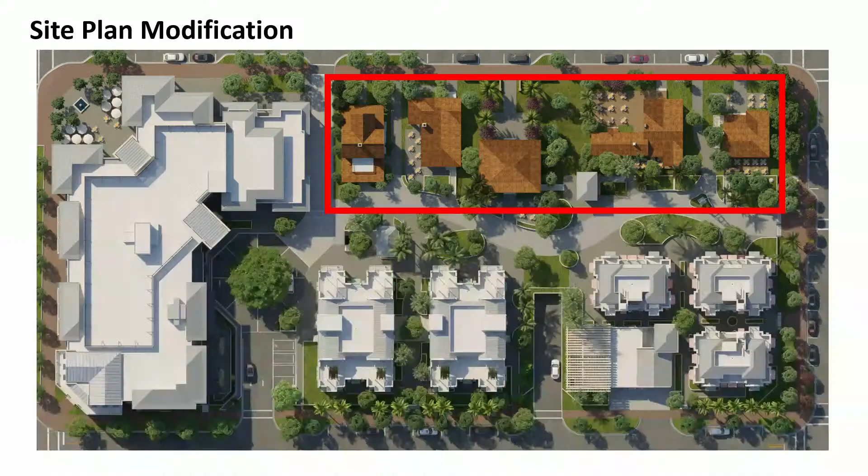Specifically tonight, I want to focus on the area within the red box, the historic homes. Just a quick outline, we're here tonight to talk about the proposed hood vents for future restaurants. Previously, we came before the board seeking approval to change the use of these from retail to restaurants, and so we're here tonight to seek approval proactively on the proposed hood designs in the event a tenant needs them for building out kitchens and things like that.

We're here to talk about the ADA ramps. I believe they might have been previously shown on the site plan, but they were never part of the elevations previously, so the new architectural set now has those integrated into it, so you can see them on the structure, as well as bring to the board's attention that as we are rehabilitating the structures, we would be replacing damaged wood only as we restore each of the homes.

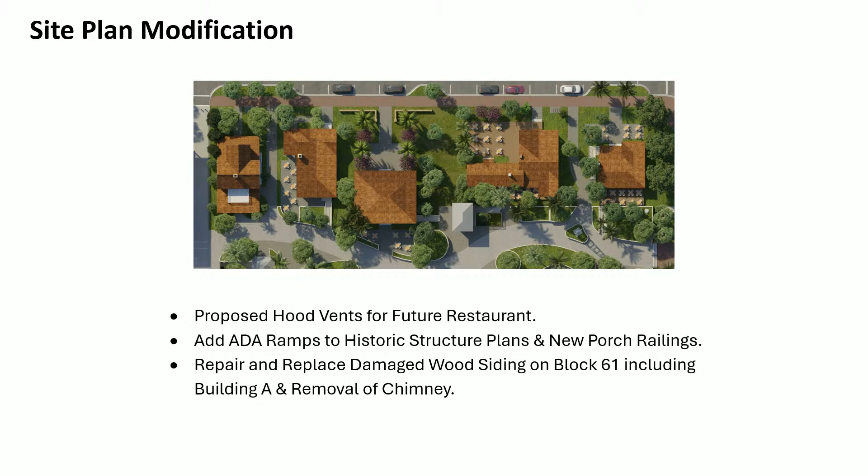So we'll go in order of all the homes. Starting with building A, the rectory. On the left side, you'll see what was originally approved. During the design process and as we're working with tenants and signing leases for all of the spaces, it was brought to our attention the concern about people falling off the porches. Tonight here, as we go through, you'll see we're requesting to put railings on each of the porches.

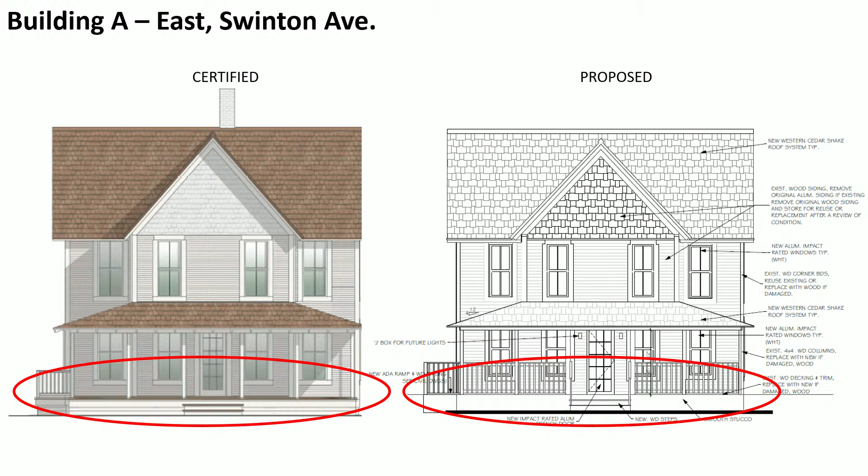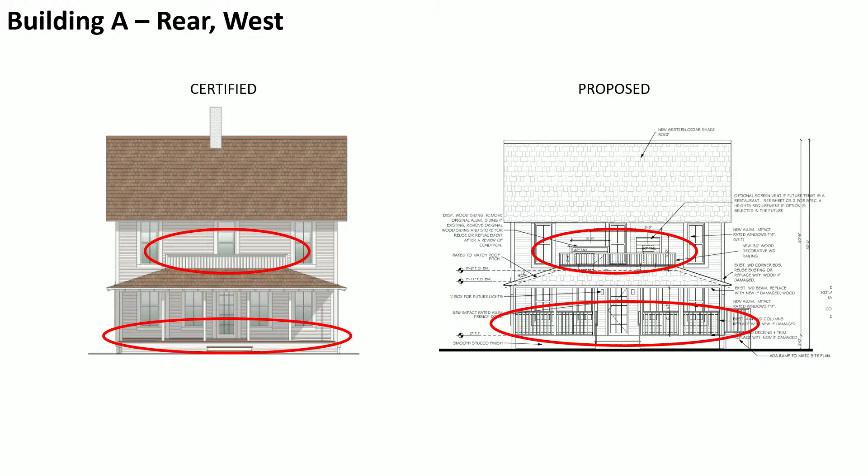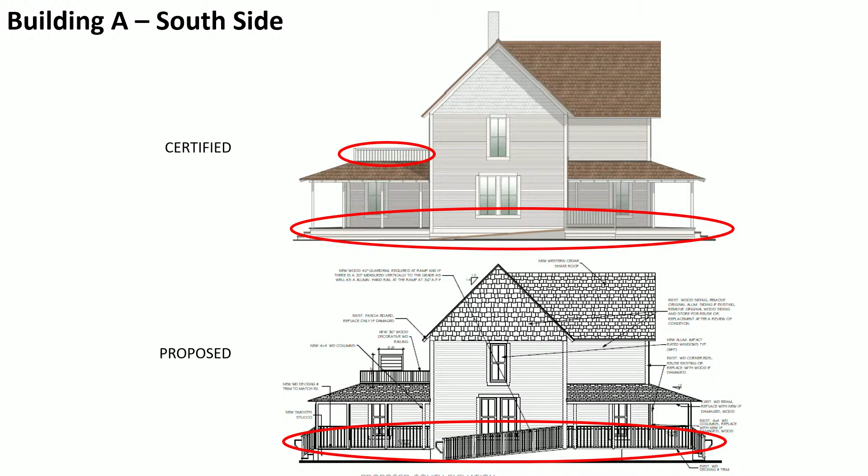On the rear, so down below, you'll see again railing detail the change, and then the proposed location for the hood vents. South side, again showing what was approved, and then down below you'll see the additional railings. I forgot to put a circle over there, but that is the proposed hood vent location.

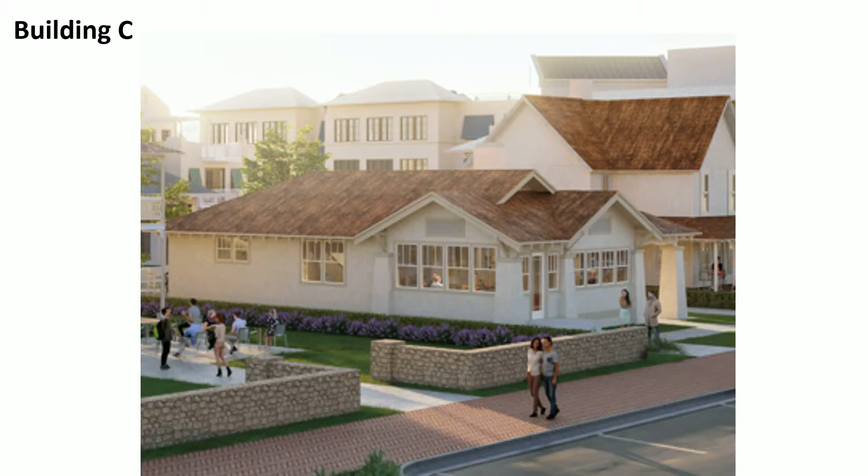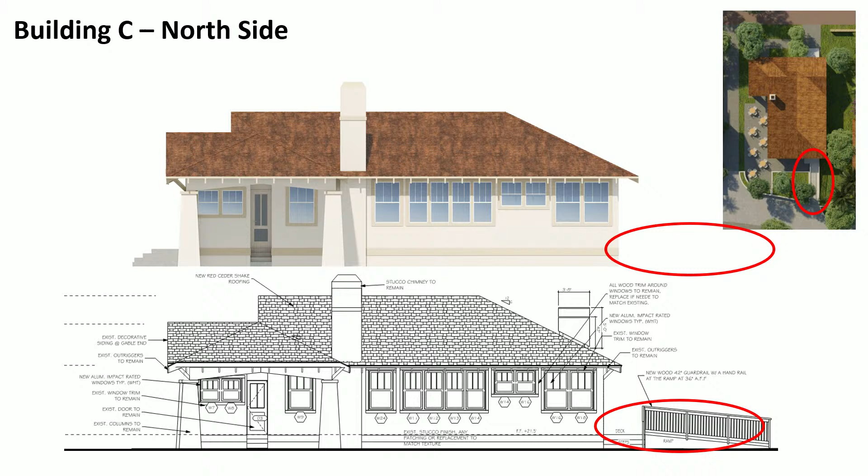And then jumping into building C next to it, adding handrails to the front steps, shown here. In the rear, adding the railing to the architectural elevation. In the original site plan, as you can see on the top right corner, we were always showing it, but want to add it to the elevations.

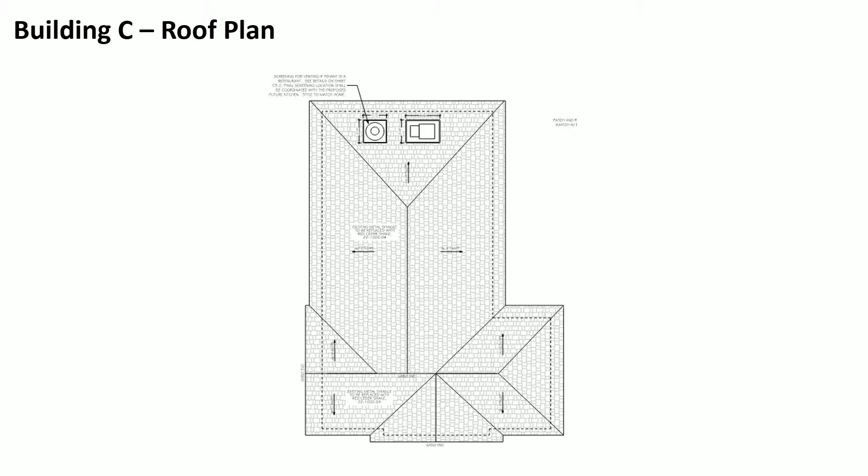And then from the south side, you can also see it's now added. And then for the hood vents, also on the rear of the building. Building C, for example, is rented out to ice cream tenant, Van Leeuwen. So I don't know if they're going to need this, but again, just seeking the overall approval.

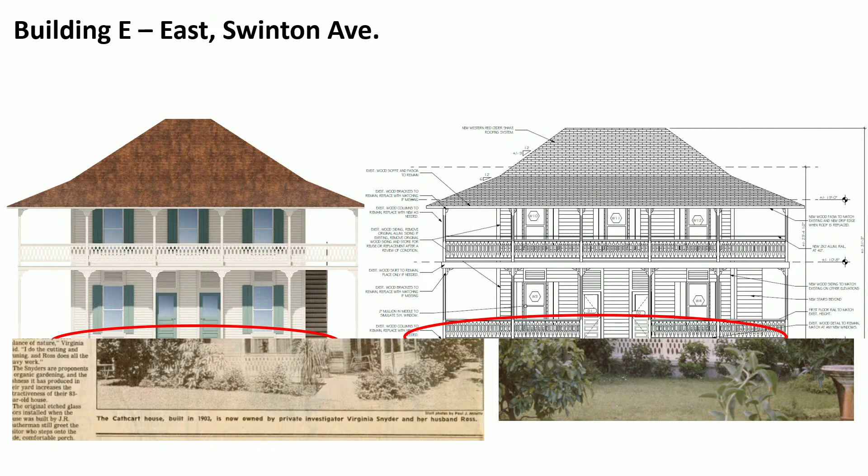On the left side, you can see the rendering we did, and the rendering on the right was what we originally were going towards to restore it. So we know later on, eventually someone did add in a railing to the first floor. And so we're now coming back, realizing that we should have kept the railing on the first floor for safety reasons, so that nobody falls off the porch. And then the railing on the first floor would match the second floor as well for consistency.

So the south side, the west side, and then, sorry, I forgot to circle it again, but you can see on the rear, that's where a proposed location would be on the west side. As well as the ramp, again, it was on the site plan, but just being added now to the elevation.

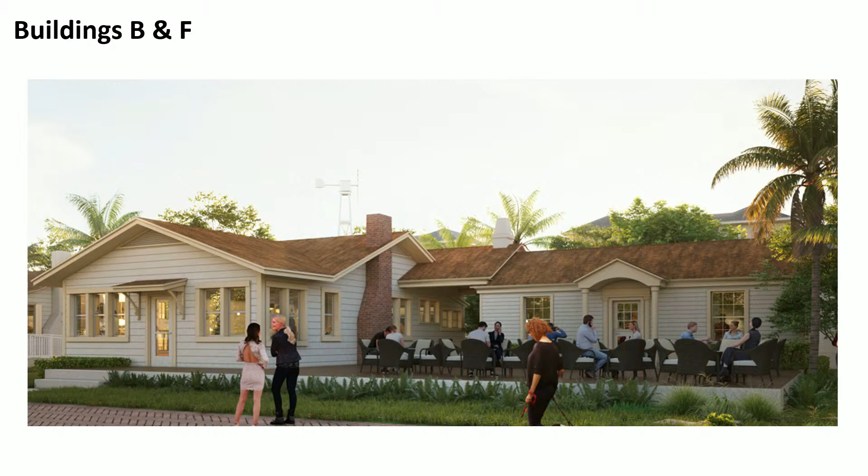The connection of B and F. In this rendering, you can see where we didn't have any railings whatsoever, on the raised area, and so coming before you now, seeking the approval to put the railing.

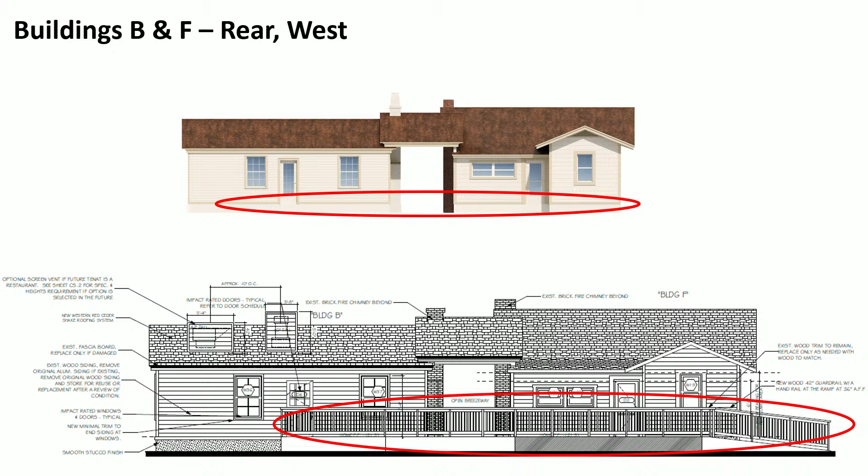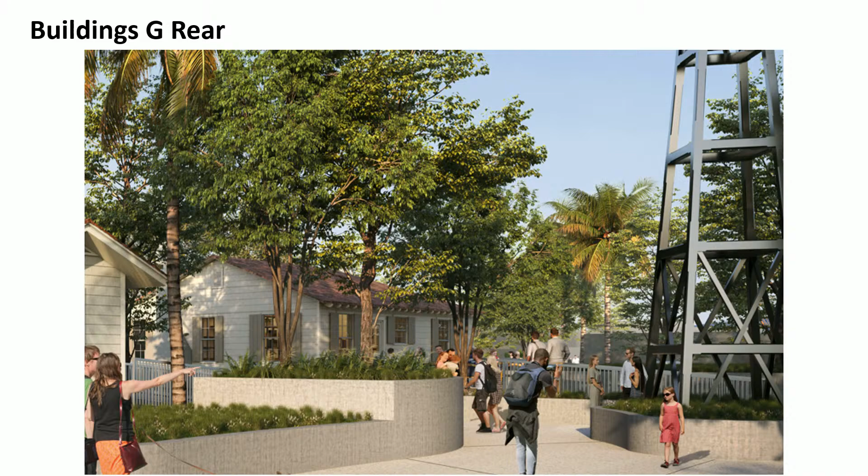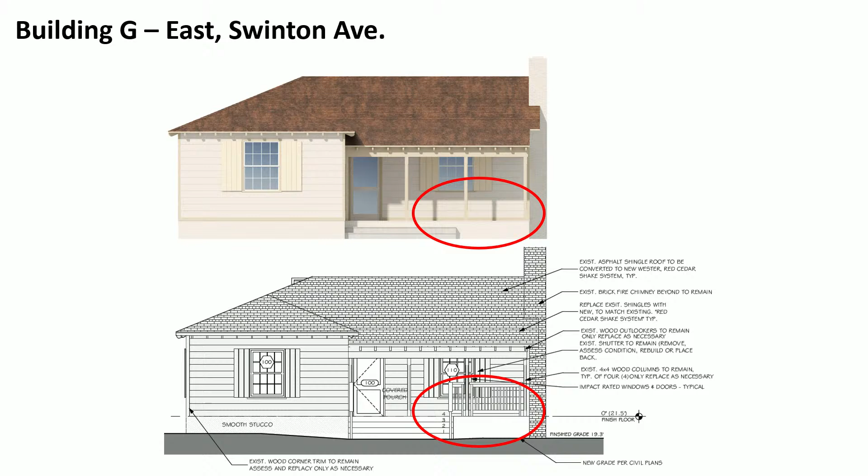Here was a zoomed in rendering. You can see where we had the railing already on the plan. The changes now are the same thing: putting a railing in the front, a handrail for the step, and on the north side you can see how the rear deck was not shown on the original elevations, so now they're being added back in.

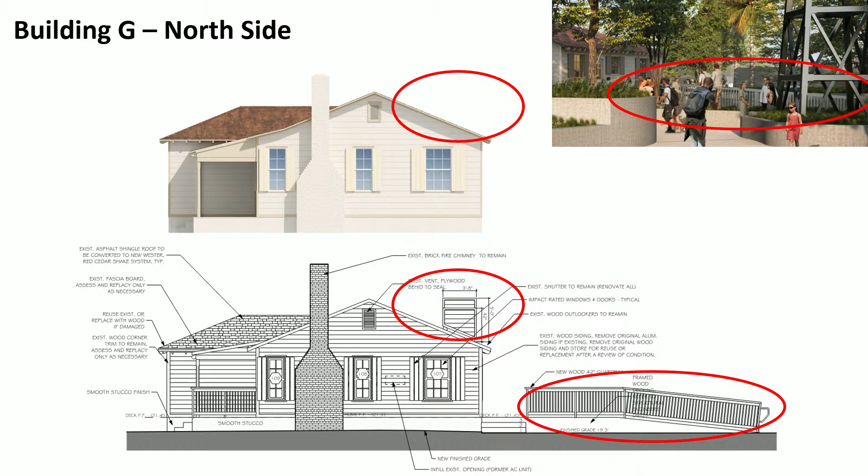And then you have the hood vent, which I remembered to put a circle on. And then on the rear as well, you can see the vent hoods and the decking. And then you see the ramp on the bottom right side.

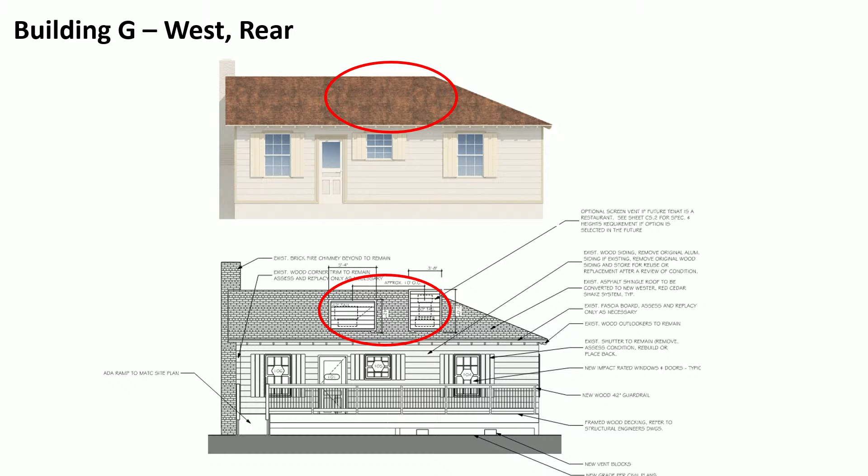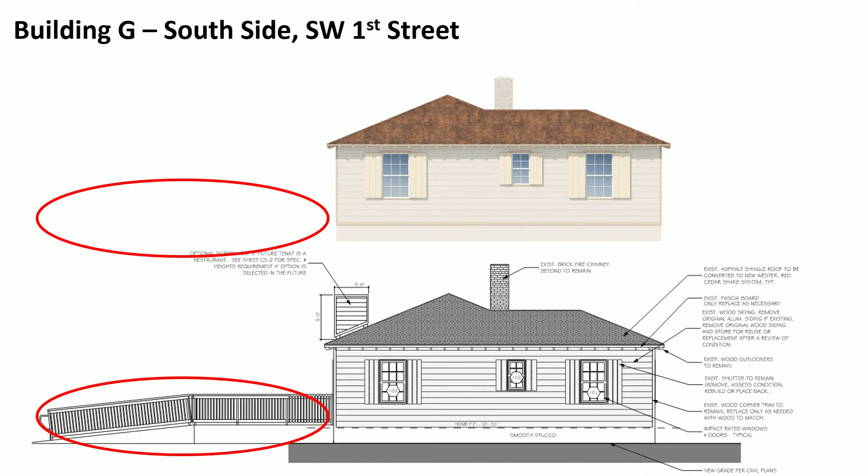And then on the south side, this is the southwest First Street. This would be blocked by the planters, so it would never be seen from the road, but this is what the elevation would look like, having the ADA ramp and the deck in the rear. And then the roof plan.

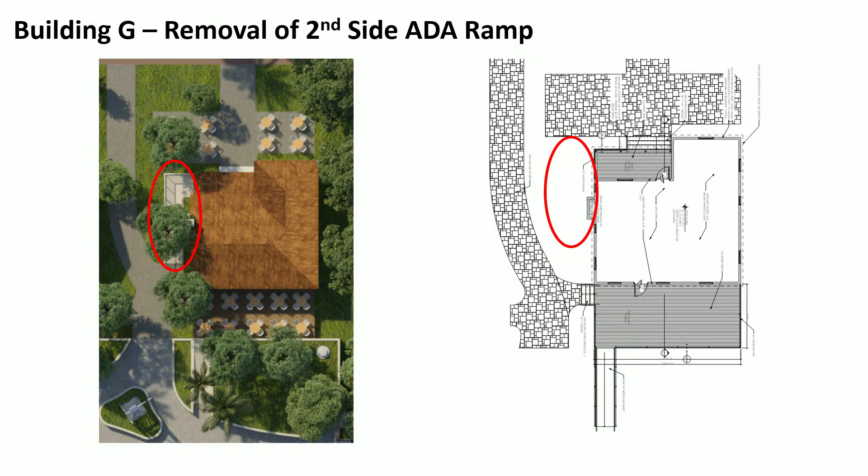And then we did remove the second ADA ramp from the front. I think after working through it with staff, it was deemed unnecessary, and it was seen from the front of the building, so to keep the historic character of not putting a ramp in the front of the building, we've eliminated it. So now there will just be the ADA ramp in the back, and that will be filled in with landscaping.

And then here's a detail in your files. You've got two different versions. The ones on the right have wood siding, so that way they blend in with the architectural style of these structures. And the one in the middle right here, that one is stucco. That would be proposed to go on the ice cream shop.

Building C is the only stuccoed historic structure on the site. The others all have wood siding. And then the detail on the left is just your 2D plan view of the cover around it, and up top on the left you've got the railing detail.

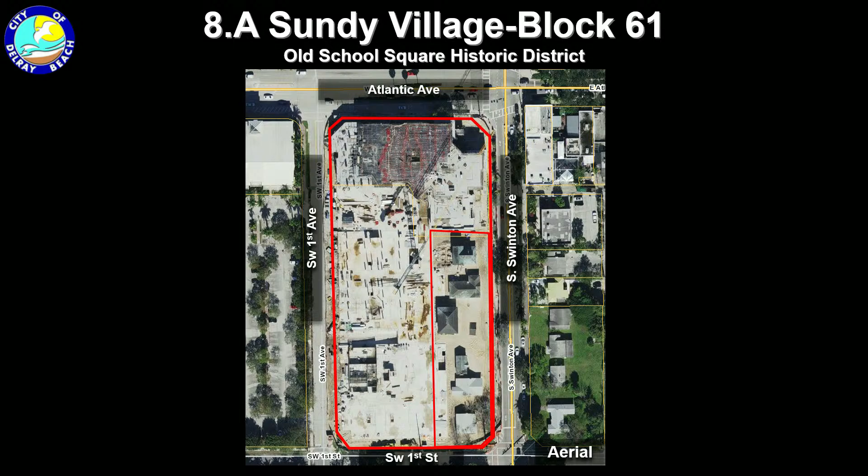Okay, so here you can see this is all of Block 61. You can see that we're just looking at the historic structures on the southeast corner of the site. This is a close-up of the site plan. So here, all the red outlines are where the ramps and the hand railings are proposed to go. I'll show you a little bit further on where the hood vents are.

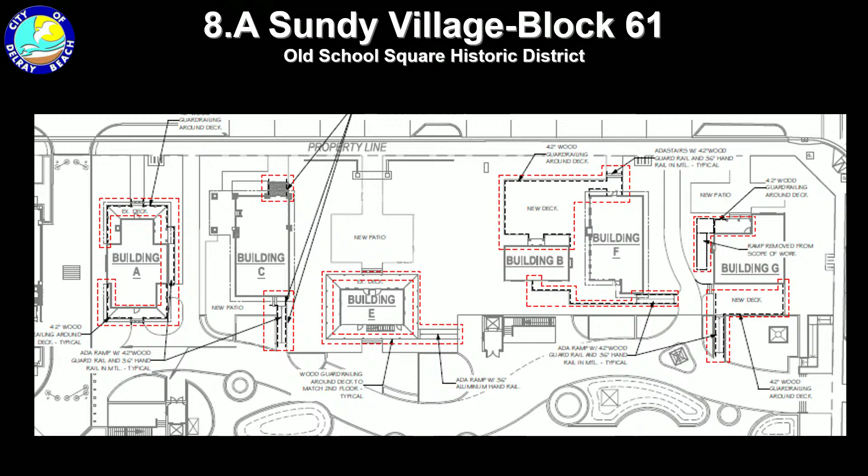Just for the record, they're requesting two, specifically one's for air intake and the other I believe is for exhaust, so each structure will have two hood vents. We did work with the applicants over time to make sure the hood vents weren't visible from the public right of way, so all are proposed on the west facing side. So you won't see them; they won't be prominent from the east. So the front facades won't be as visible.

As Mr. Hockman did mention, they have 3 different types of venting. The top 2 are proposed for all the wood-sided structures, and the material to be used is Hardie board, which is appropriate because this isn't an original part of the structure. The third one is for the stucco building, which I believe is Building C, and that's just to match the siding on that one.

This image that's really small here is for the handrails. I believe the handrails are going to be aluminum, with the rest of the railings to be wood.

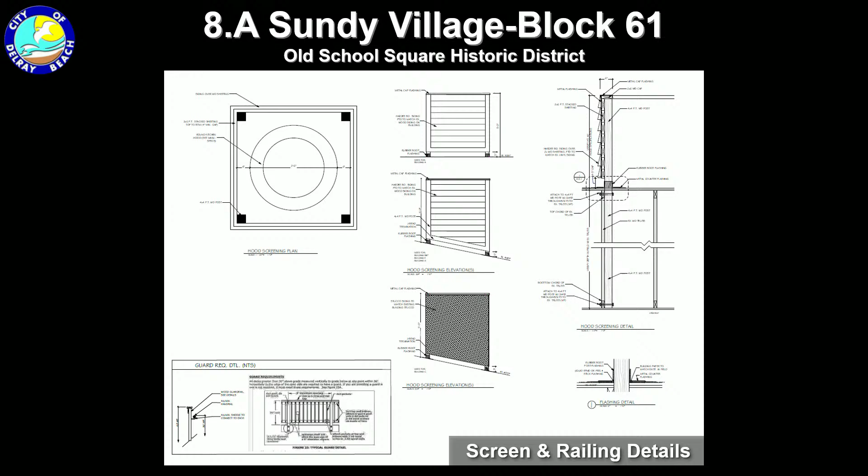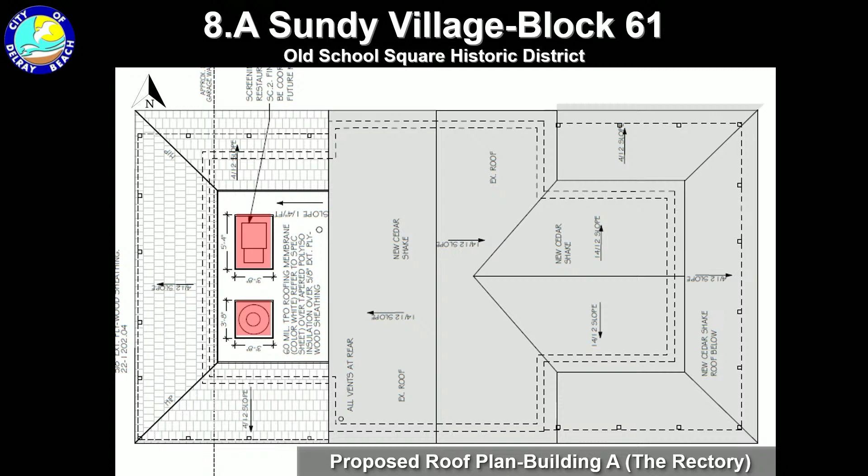So the highlighted areas are going to be floor plans and roof plans that show where the hood vents and the railings are going to be situated on each of the structures. First one is Building A, which is the rectory. Here on the west side, you can see the 2 proposed hood vents. The red outline on the floor plan shows where the hand railings are going to be, in addition to the red highlighted areas where the ramp is proposed to go.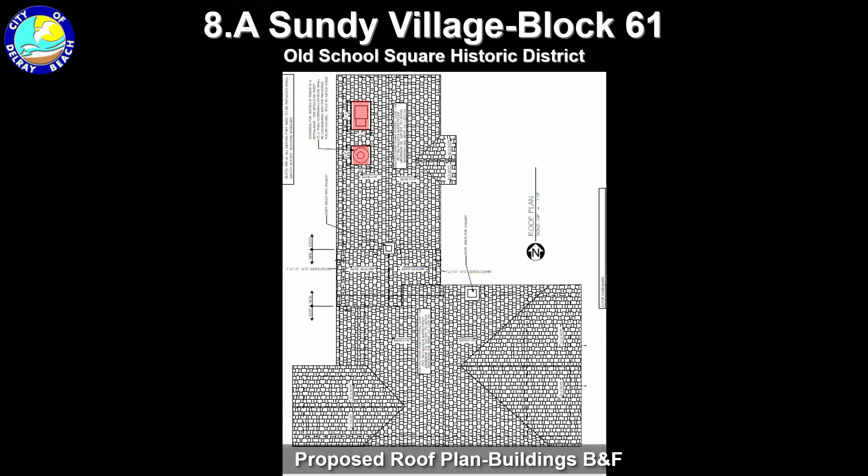Okay, this is the proposed roof plan for buildings B and F. Here you can see this is also on the west side of the structures. Here you can see all the hand railings as well as the proposed ramp.

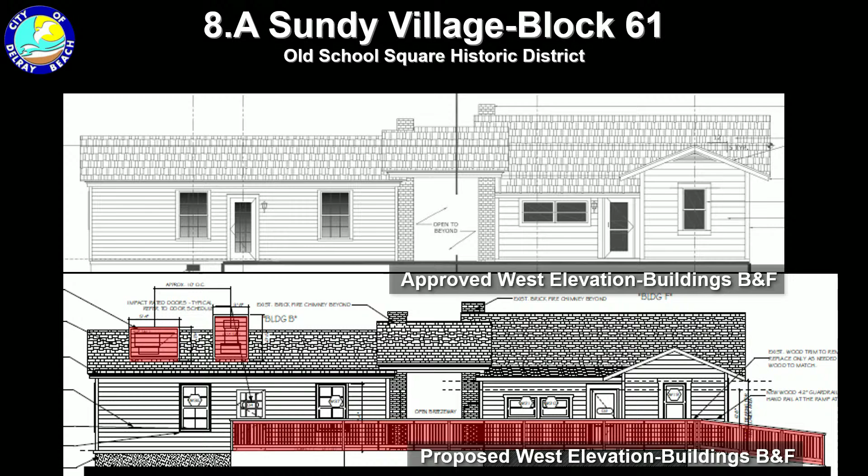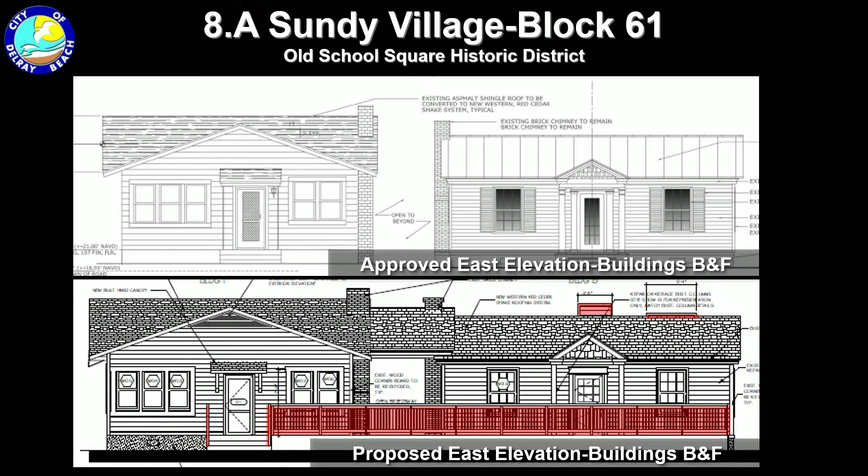Okay, this is the west side, so you can see most of the ramps and the hood vents are more prominent. This is the south. Proposed east, so they're slightly visible, but not as prominent as the west.

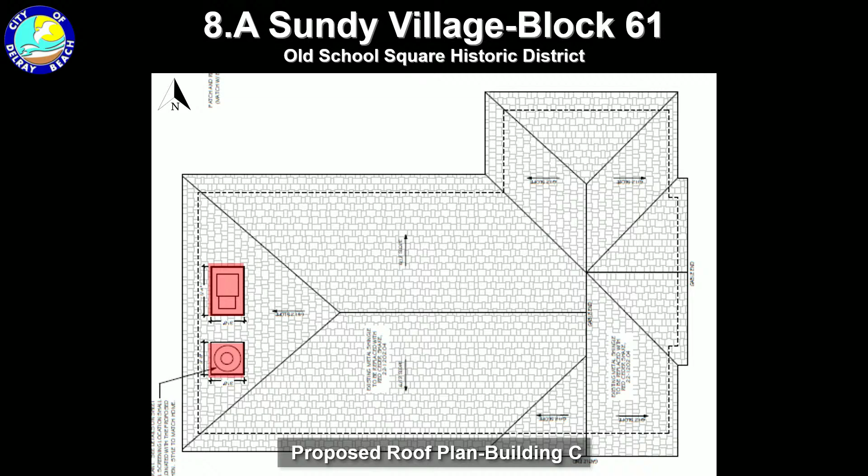And then, as they noted, I think this was the one where they removed the original ramp from, so they have the guardrails on the front in the east, and on the west they have a longer ramp.

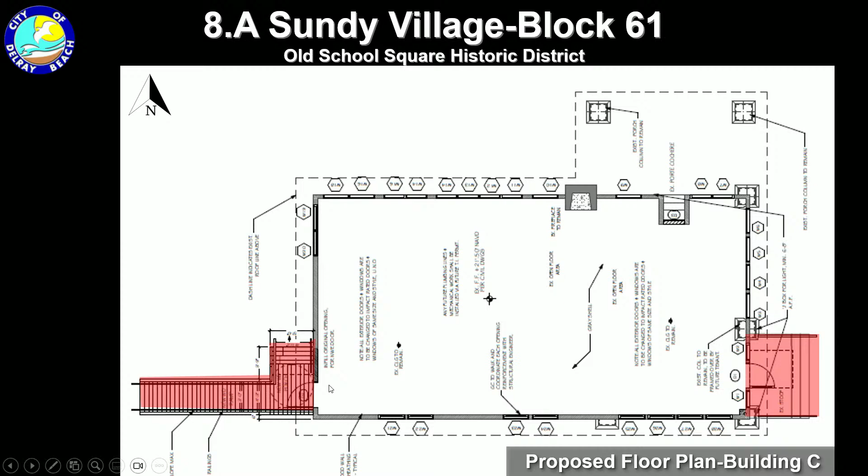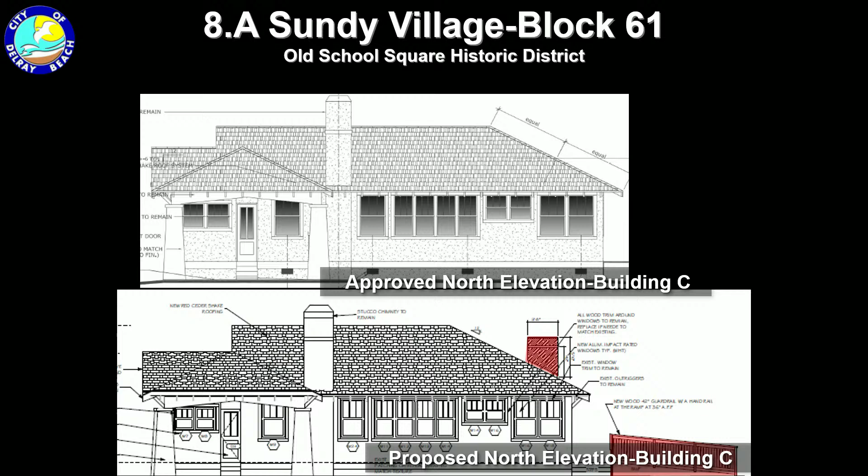Okay, this is building C again on the west side. This is south. This is north. And this is the east side.

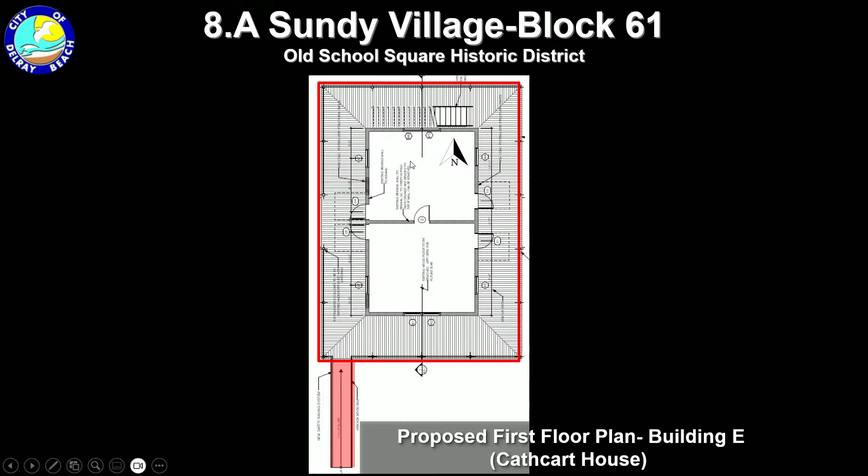This is building E, this is also Cathcart. You can see the railings are all on the outside of the structure on the first floor, and the ramp is to the south.

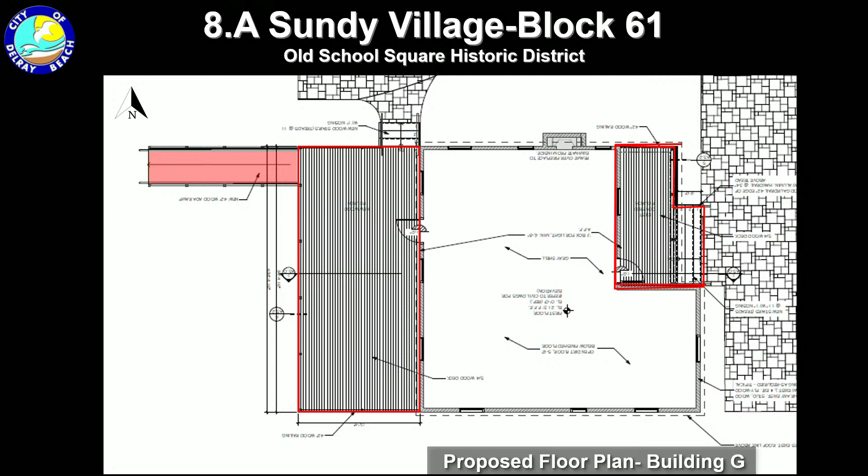This is building G. Hood vents are also on the west side. Here you can see the visual of the railings and the ramp.

This is proposed south side. This is the west. This is the north. And this is the east.

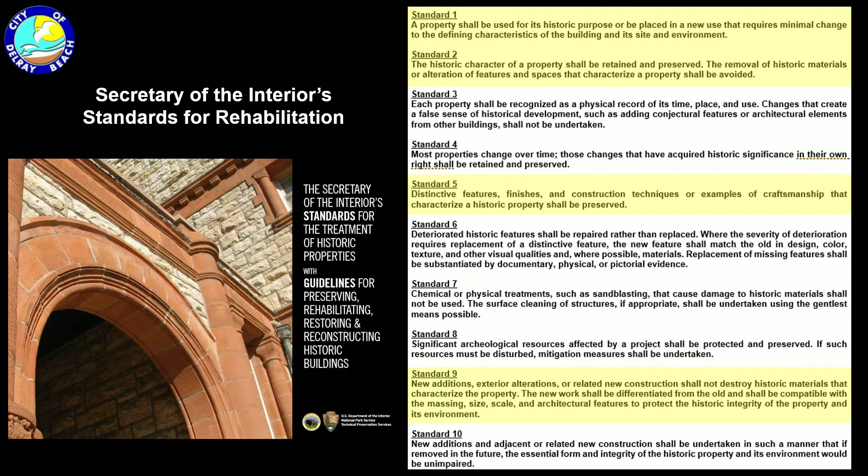Okay, the Secretary of the Interior's standards that applied were standards 1, 2, 5, and 9. These are some of the excerpts.

We did note that with the request for the change of wood siding, all the replacements, appropriately any type of wood siding that needs to be replaced should be beyond repair. We had a site plan technical item, and we talked to the construction workers on site, who documented quite a bit of all the different changes they made for the siding. They're going to give us documentation showing that the damaged wood beyond repair has been replaced, and what was salvageable is still existing on the structure. So we just added that as a site plan technical item.

And in addition, we did mention the siding, the ramps and the guardrails, we considered those also appropriate materials.

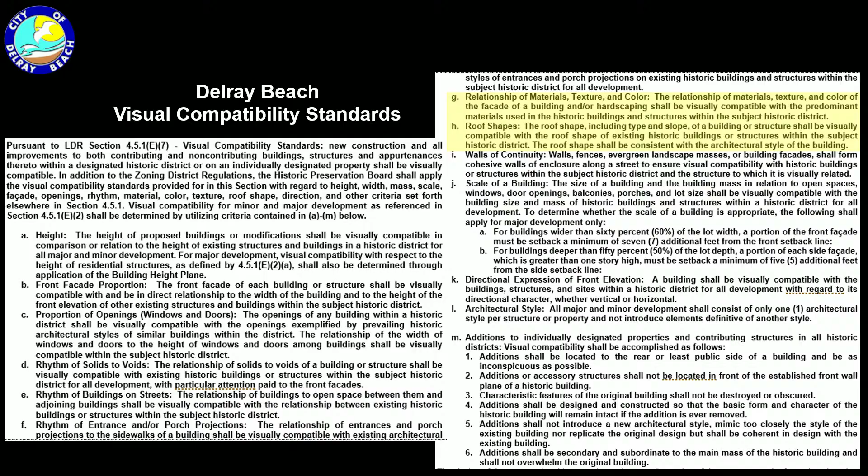Okay, roof shapes and materials were the standards for visual compatibility that applied to this request.

Did we have, at the time of print with the staff report, the state's response? Yes, we did review it because as a CLG, they now offer a review for ADA ramps and materials for historic structures. We submitted the ADA ramps and the hood vents to the Department of State, Division of Historic Resources, Bureau of Historic Preservation, to be specific. They did the review and had no comments. So all the requests for the ADA ramps were considered appropriate at the state level as well as staff's.

Thank you for that. And that concludes my presentation.

Okay, any comments from the public? Now, I know there were a couple people in the back of the room who stepped out. I'll just take over for them. Well, we can do that.

George Long, 46 North Swinton Avenue. I'll leave this business about Department of Interior and visual compatibility up to you guys, but I was a construction manager for several years. You have to have a good vent - no vent, you will have grease pouring down literally on the roof, everywhere. Vents are important. Secondly, as for the rails, that's a safety issue - people can trip on anything and fall off anything. I've seen people hurt themselves tripping over a drop of concrete the size of a quarter and going to the hospital. Really. So those are important items. They make sense and they're necessary, but you guys worry about what it looks like.

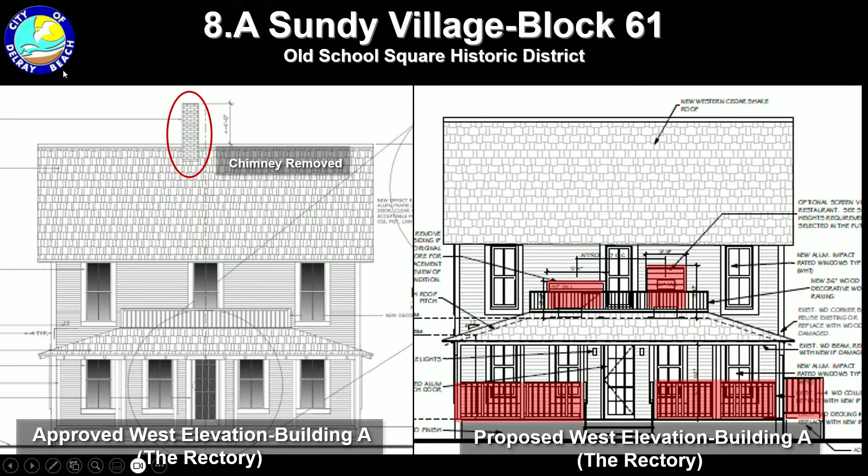We'd have to go and double check that, but I remember there was a whole separate chimney on the exterior of the building, not just the brick piece popping out of the roof. Based on photographs we had, from before 1928, before the hurricane - I just remember there was this vertical chimney thing as part of the rectory, on the left side, and that one was already approved for removal. I'm not going to make a big deal of it, it's a good comment. No, I actually liked that chimney, that vertical little piece.

The other thing related to this - are they going to be colored in some way? Are we using a palette of Victorian sort of colors? No, right now the approved palette is white with cream. The only building that currently has approval for color is Cathcart, which I think was called Parisian green. But as tenants come and sign leases, if they want to come back before the board and request approval for a change of shutters or door color, anything like that, we left that open.

We left it for the tenant to come before the board with whatever, so they might be able to use their own, with approval of course.

We hope that there will be some differentiation in color scheme from one building to the next. In talking with our partners at the state, they discourage all the buildings having the same exact color scheme, the same exact roof color, all that repetition in color. They would prefer to see some unique colors appropriate for Victorian or a small traditional building. So we've encouraged the applicant to do that, but at this point they're building and waiting until they have tenants so they can customize and come up with a scheme. As a reminder, some colors are approved at an admin level, which are typically more muted.

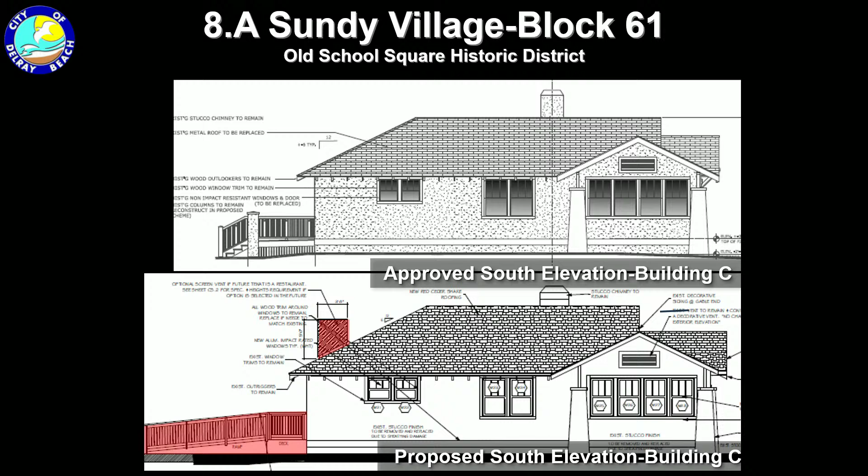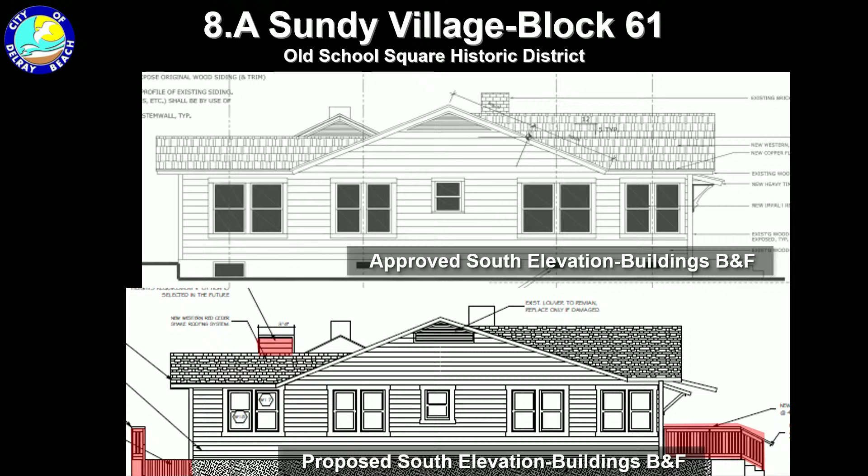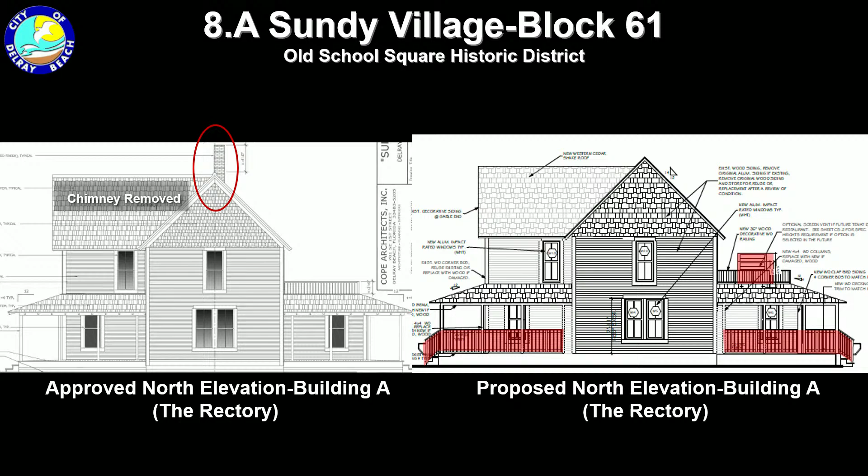I think that's a very helpful comment that Simeon, you may want to respond to - is it really a good idea to replicate the railing design on the ADA ramp, because it wasn't an original piece? It's a thoughtful comment.

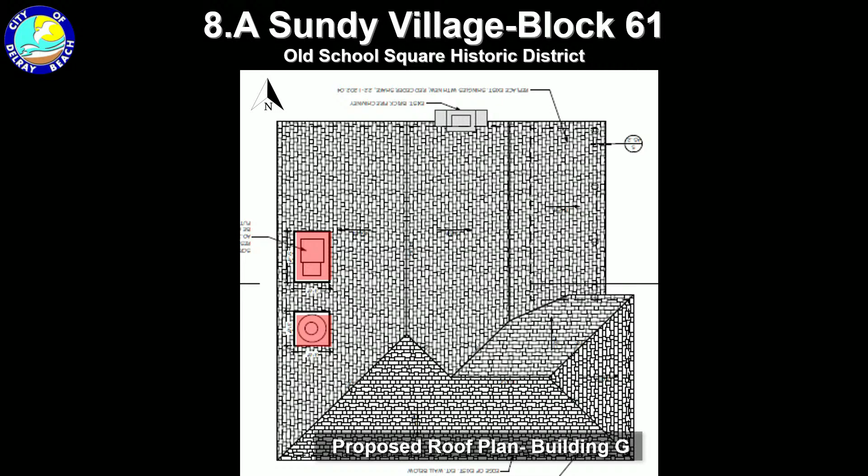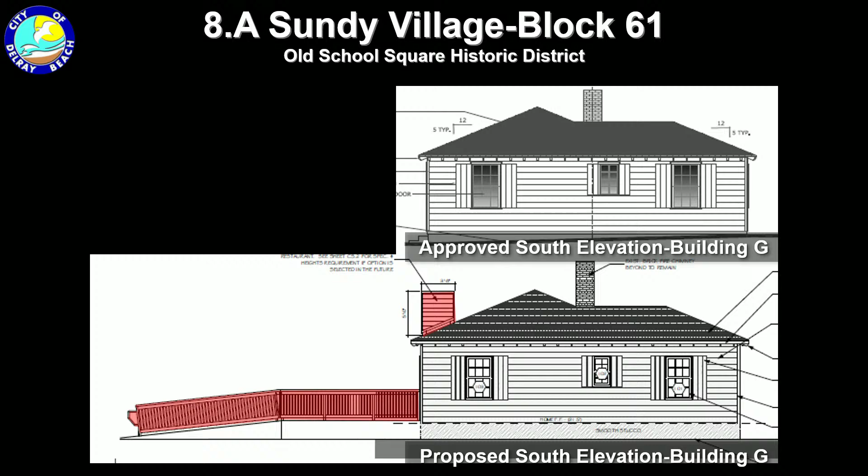Could it be a vertical picket? It doesn't have to be. But I did see - I'm going to check again because I'm not totally crazy - there was, in the building, I know the C and G, isn't it one of them? That one's angled too, kind of like this one instead of vertical. And that one too.

Could we ask Simeon to please come up? Simeon, I think your intent is probably to do it like... Yeah, it's supposed to be vertical on that one, and we'll do all of them as vertical.

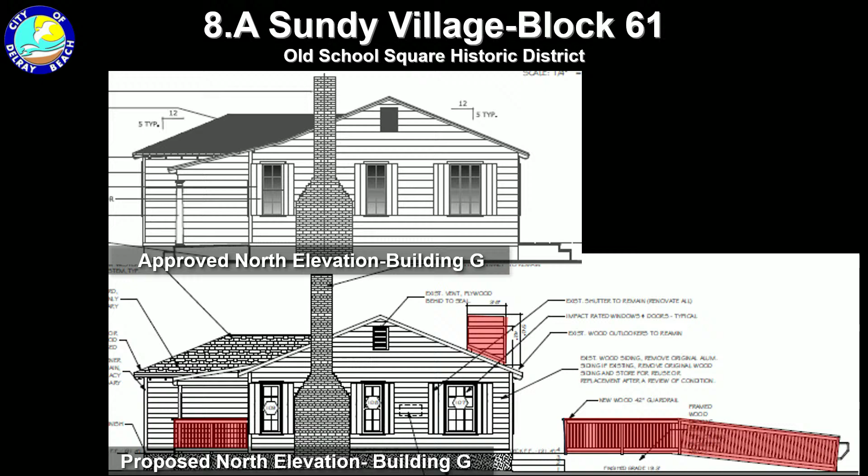And then what are your thoughts on - I know it's probably a Jared and Simeon question, but I think he makes a really valid point here, that duplicating the historic railing on the ADA ramp really isn't appropriate by the Secretary of the Interior standards. We did talk about that, which is why we're here at the board to present it. That was an issue that Ms. Katharina brought up as well. So one of the options we talked about is potentially to do what Dada did - just a regular aluminum handrail, basically making the ramp disappear and really just focusing on the railing.

We felt it would be nice to match it, but if the board doesn't like it, we're open to just doing a regular handrail. Well, I think it's less about liking it, more about concerns of whether it meets the standards. Correct. And if it's a concern, we can bring it back to a handrail and make that ramp rail basically disappear.

I wouldn't recommend putting pickets or anything on there because then it really would stand out and look off. But if we just do a handrail and not necessarily a guardrail, since it's technically not required, I think it would alleviate everyone's concern. I don't think ownership has a problem with that. We're open to it.

This project has always been a private-public relationship. Not one person has all the answers, and so we're here before the board. We're here to preserve it, and Sundy Village is very special to everyone. So we're open to opinions and direction, but totally okay either way.

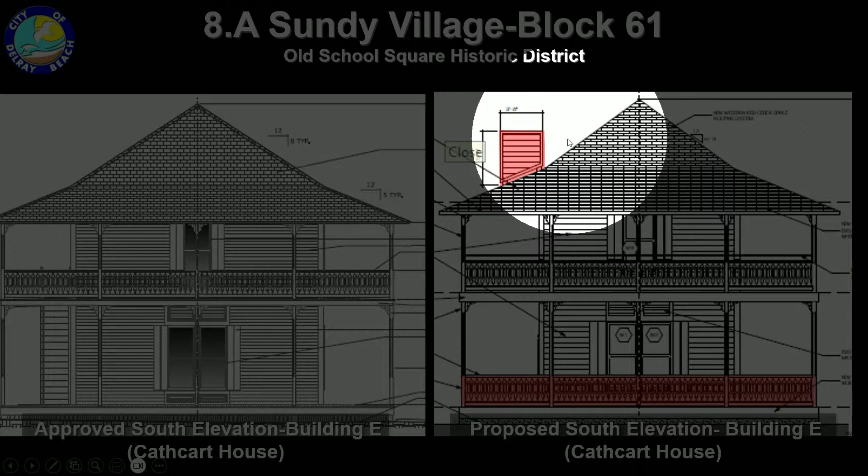And then the Cathcart house, you're going to move that? Yeah, I think what we'll do is add that as a site plan technical item. This one here, obviously it's going to have to slide over to this part of the roof, so it's going to go up a little higher.

Okay, I don't have any further questions. Sorry, on the Cathcart house I noticed something in the rendering I'm not sure about -- those louvers above the openings, are those original, or is it part of an intake air or something? Which louvers? Oh no, that's the window.

Decorative detail. But were they original? I don't think they're actual louvers, I think it's just detail. Yeah, because I've seen a rendering that seems to have them and another one that didn't, so I wasn't sure what was the original condition. What you see on the left is what's approved. Okay, if they're part of the design, then it's fine.

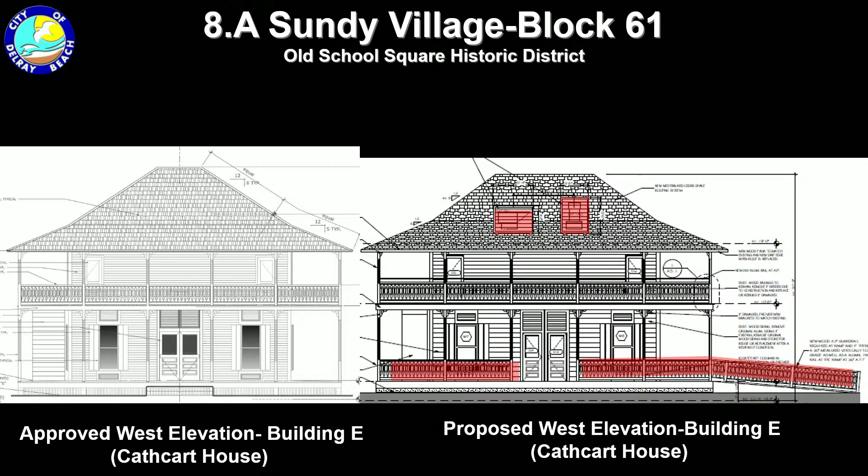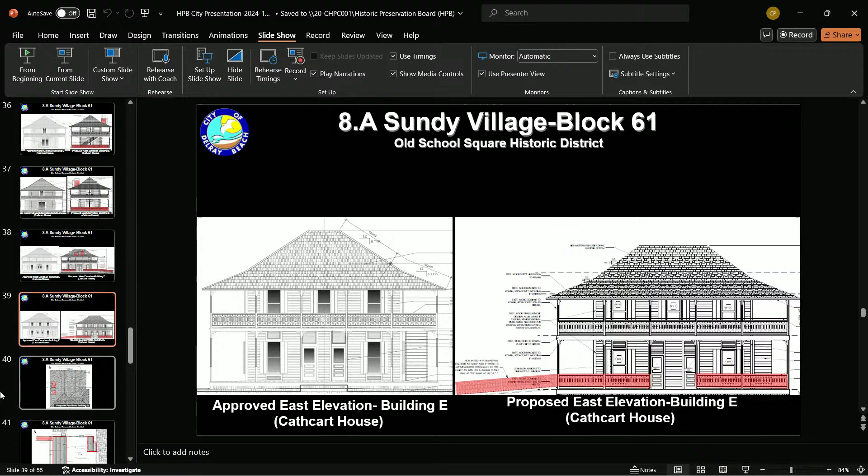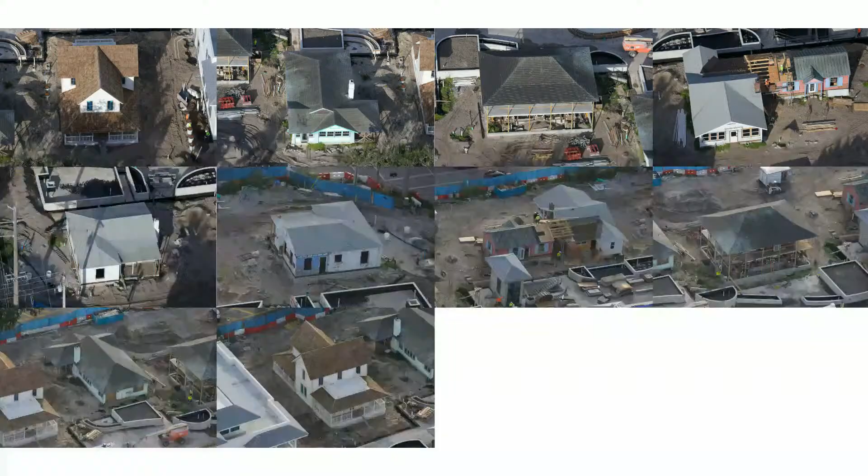It's just that for a moment I thought there was nothing above the window. I would have to go back and do a bit of research, because the previous architect liked to do those designs above windows, so I don't know if that was architectural license from the previous architect or if that was part of the original design. I'd have to go back and do a little research. It was just a rendering that flashed through and looked like it didn't have those, so I wasn't sure.

Maybe I missed that. Oh, go back. Oh, right, they're there. The pictures I'm looking at show the different color. Can you zoom in on the picture?

I'm not sure, maybe on the next drawing. I don't know that they... it's not a big deal, but right here, I was more concerned that they actually vent for something, above the doors, not just decorative. I would have to go back and really examine these.

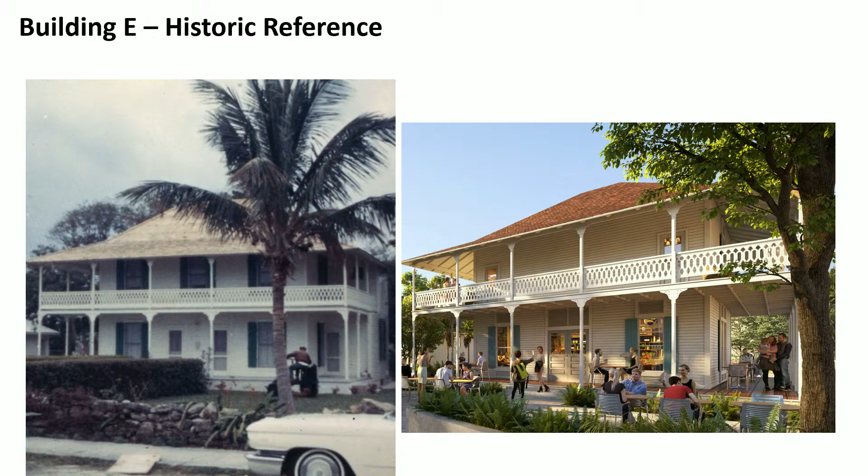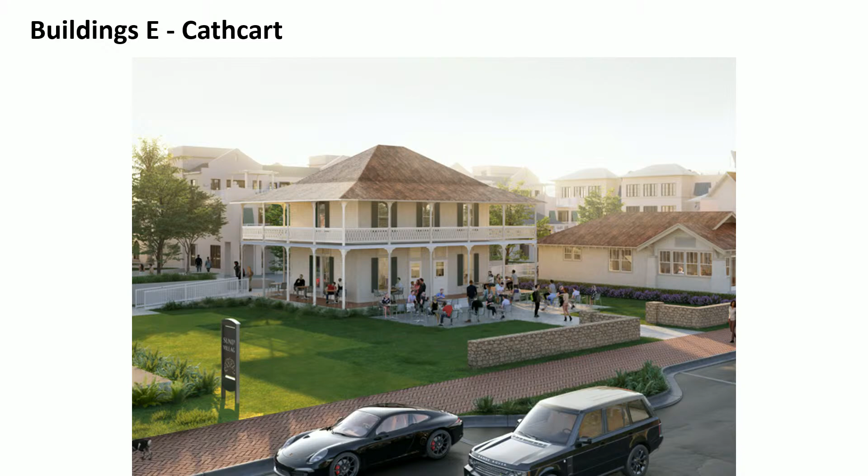So I have a couple questions. I'm a little bit worried, Jared, when you say the vents are in the rear of the building, which makes sense from a historical perspective and not seeing them. But there really is no rear to these buildings because they open up onto a plaza. And I'm wondering, from a design point of view, because you're probably going to have as much if not more traffic coming from the west in the garage than you are coming from the east, has there been any consideration in terms of design that would minimize that view?

I can answer that question. One of the original designs when we were looking at putting these screens, I tried to put them on the north or south side of the building so I could leave the back exposed. But that was one of the comments brought up by the board, since it is on the side and can be seen from the front, that I should move them over to the back. But originally I did try to put them on the side for that reason.

Which side do you mean, the north or south? We certainly have, on the side setbacks, some considerations for differentiation that perhaps this could fall under if that were a better location.

I can see the wheels spinning around in your head. Well, I'm waiting for you to throw it to me before I interject.

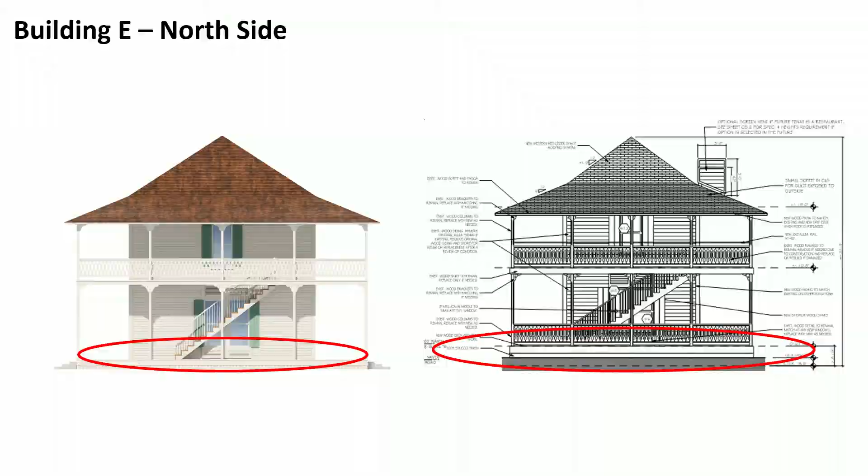That crossed my mind too, and the way I thought is a lot of people will be driving on Swinton, and there's a lot of traffic there, so I think that maintains the historic character of the street, and then you come in and there's a new character there.

Well, I'm just thinking that a lot of the socialization and the walking is going to be in that piazza, in that walkway. Yeah, particularly there's no great solution. So the kitchens will be in the back, and people will not walk in those doors that are along that west side? I can answer that question.

We are going to try to push the kitchens to the back. However, they don't necessarily have to be all the way in the back, because luckily the way hoods are designed these days, even though the hood is large, what comes out of the hood is about a 12-inch metal vent. That metal vent you can snake through the entire house and technically pop it out anywhere. So it doesn't limit them on where to put the hoods, but we do make the recommendation for them to put the hood in the back, also for access to cleaning, and you really don't want a kitchen right at the front.

And if I may, correct me if I'm off here, but originally we also studied the potential of using the existing chimneys to avoid doing this. However, the size of the unit didn't sit properly, so we had to do it the conventional way.